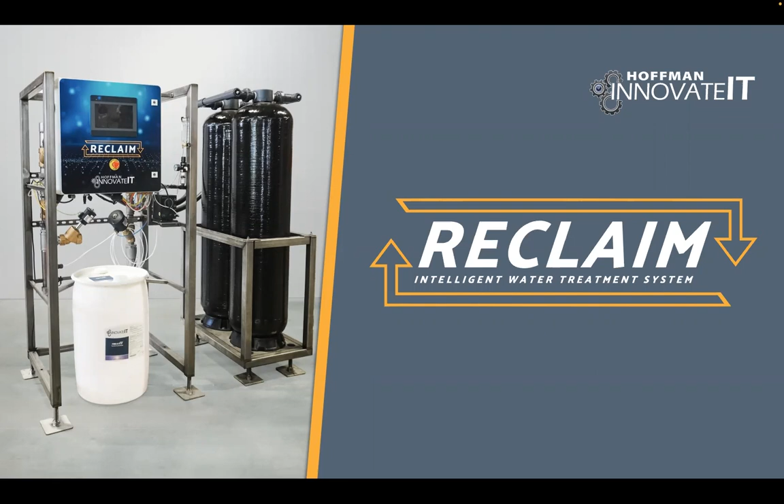Hello, everyone. Thanks again for taking the time to join us today for the webinar on our reclaimed water treatment system. This is one of the two products that we launched towards the end of 2022, something we're very excited about. I know some of you may have had the chance to see it at the Northeast Regional Car Wash Convention last September or at the SCWA Expo just a couple weeks ago in Texas.

This webinar really was going to serve as an overview of the system and some of the thinking behind the development and the challenges that people have been experiencing with existing reclaim systems that we're really trying to address with this system.

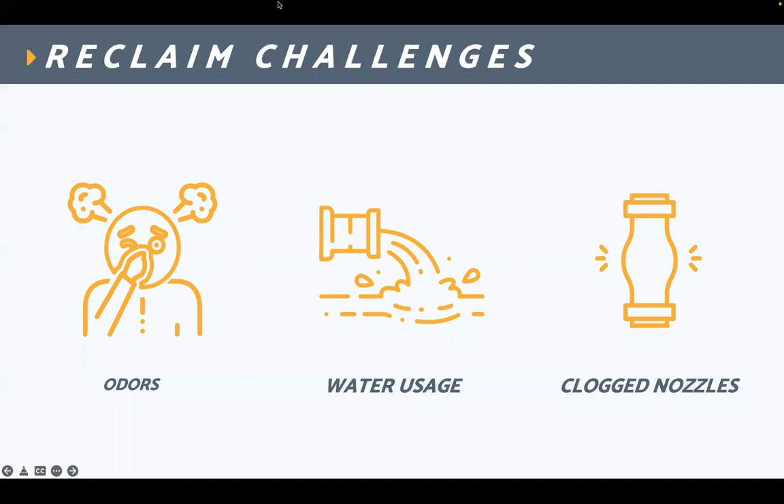The way we approached it, our solution to these odors, we decided to do chemical dosing of the system versus the commonly known ozone, which is somewhat dangerous and has a short shelf life, so to speak. So we worked with a local blender. We developed a non-hazardous chemical, which can be shipped via UPS if you happen to run out and needed a 5-gallon pail shipped right away. But it's user adjustable, which is really nice. So you can dial it in for your specific needs and cost per car.

Our system, which you're later going to see, could be considered a lower volume reclaim system. What we found is you really don't need a ton of water. You need a specific amount of water that you're going to use in your tunnel. Anything over and above that is great; you can use it to wash the conveyor pit or conveyor belt rinse system and all that. But we really wanted to get to a point where we treat the water you're going to use in the tunnel and stop at that point. That way you can reduce big storage tanks, holding tanks in the back room, which always cause odor. You got floats that overflow and you come in, the tanks overflow. And so we wanted to avoid all that.

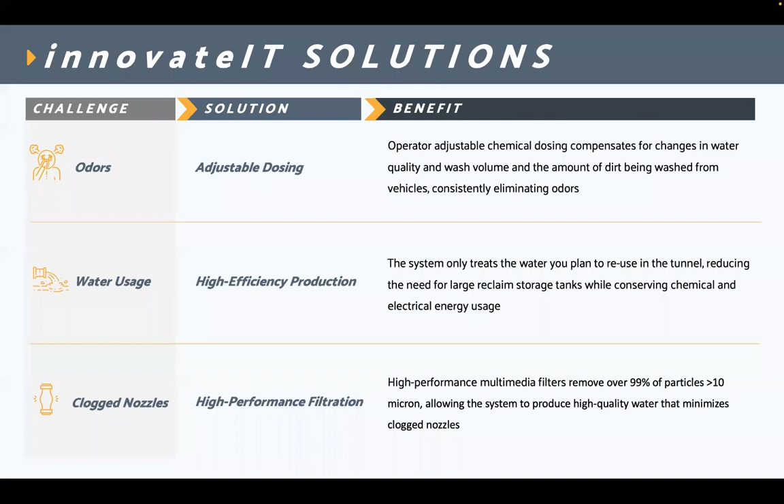Some of you may know, we like to install this equipment in our own washes and some select other beta washes. For our production run, we used a local wash right there in Colonie. Again, they were unclogging the nozzles every hour if they really could. We ran this unit for 81 days in that wash, and the manager did not clean the nozzles for 81 days. We pulled the beta unit out and proceeded to go into our main production design.

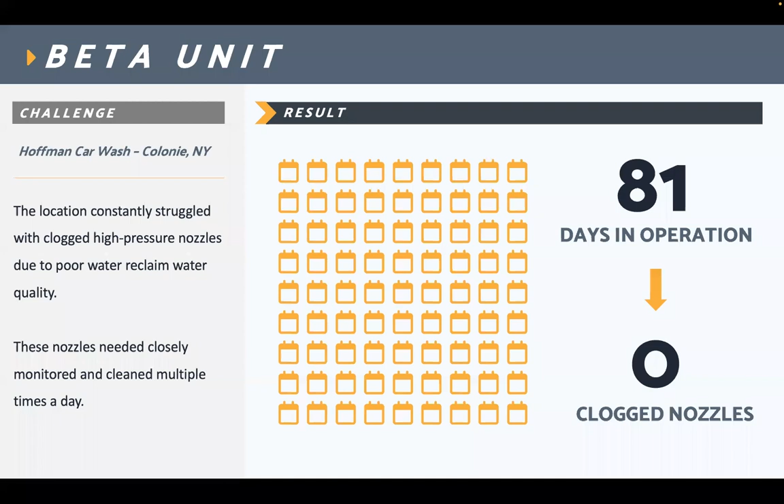So here's what the system looks like. We'll do a brief overview here. We've got a really good user interface, a touch screen on the front control panel where you can see everything the system's doing. Any messages or alerts that the system wants to notify you of will be on that screen. That's also the screen you would use to make site-specific adjustments.

We have high-performance multimedia filters on the right-hand side. Each one of those filter tanks will do 10 GPM. Currently we have a 2-filter system and a 4-filter system, and we're working on the 6. But our system, right now, has the standard flow of 20 gallons a minute, which is what's pictured here, and then up to our high flow, which is 40 gallons a minute.

Those numbers are quite a bit lower than what you typically hear about on trade show floors. Many people say, oh, our system can do 100, 150 gallons a minute of reclaimed water. We somewhat got trapped in that too, and bought several of those systems, and really realized that if you're doing 150 gallons a minute and washing 3 cars every minute, we weren't using 50 gallons of reclaim per car. We were using 10 to 15 gallons of high pressure reclaim per car. So that's how the math works out.

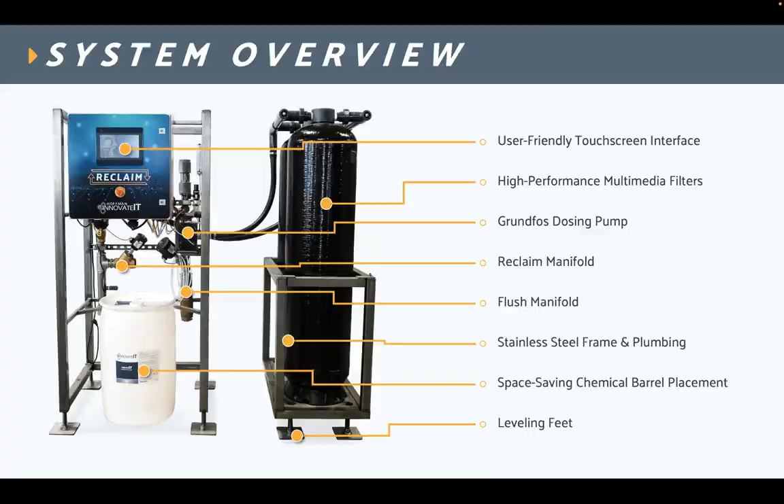Another integral part of this whole system is our micro bubbler stand that gets placed in tank 2. We're using compressed air for this instead of a separate 3 or 5 horsepower blower. We found through working on the beta units that you really don't need that big blower. You just need a small amount of air bubbling in the tank to increase your dissolved oxygen. This one has a stainless steel frame, and the air comes out from under those pans, creating a really nice aeration in the tank. You can hang it by chains or stainless steel cable, whatever your preference is, so you can easily pull it up out of your access manhole. It's quite simple, nothing exotic about it, but no maintenance required.

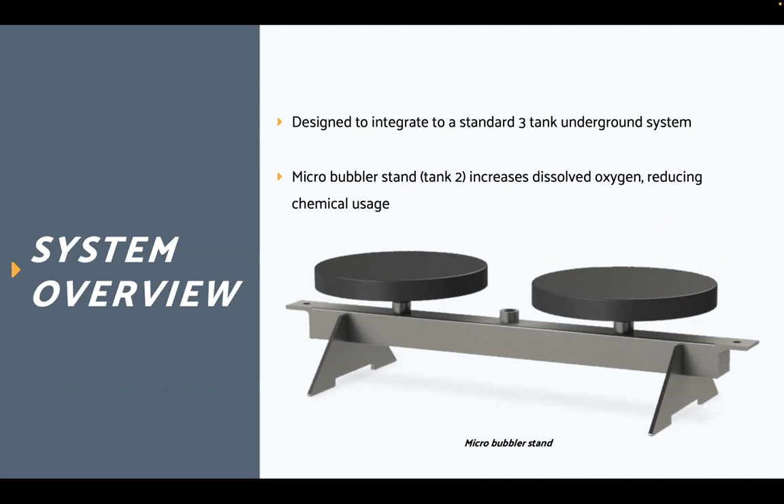The backbone of the system—every system has something that really separates it from other systems—and I would say in our system, it's this Grundfos grinder pump. Many of the systems out there, we all know, have a pump in the back room with a strainer basket. You have to prime it, and you have to clean the strainer basket constantly, and every time you clean it, you have to prime the pump again. Something funny that we run into a lot, even at our own locations, is we go to pump out the sediment tanks outside.

Truck comes, sucks it all out. Now the water level's below the inlet, and now you've got to wash a bunch of cars and wait to prime that pump inside again.

This pump and system we're utilizing here, this grinder pump from Grundfos, is outside in your third tank. It's a grinder pump, so any kind of trash in that pump, it'll literally grind it up. There's no need for a strainer basket, there's no check valves, it's self-priming because it's submersible. It's really just a rock solid setup.

If there's water in a tank, you turn it on, it's going to run, it's going to pump water. Roughly speaking, rough numbers, 60 gallons a minute, about 50 psi.

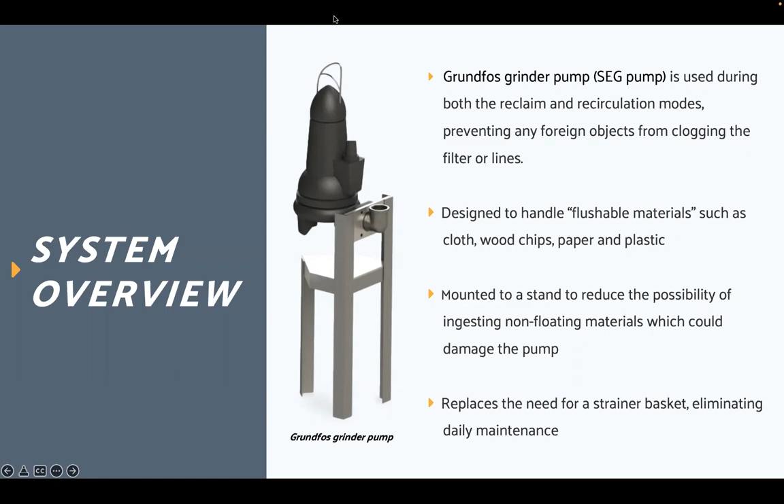Okay, now we'll get into some of the features. We're really looking at treating that water to make it as usable in your car wash as you can through the media filters. And just reiterating again, the grinder pump replaces that pump in your equipment room that has a strainer basket, along with the high efficiency multimedia filters.

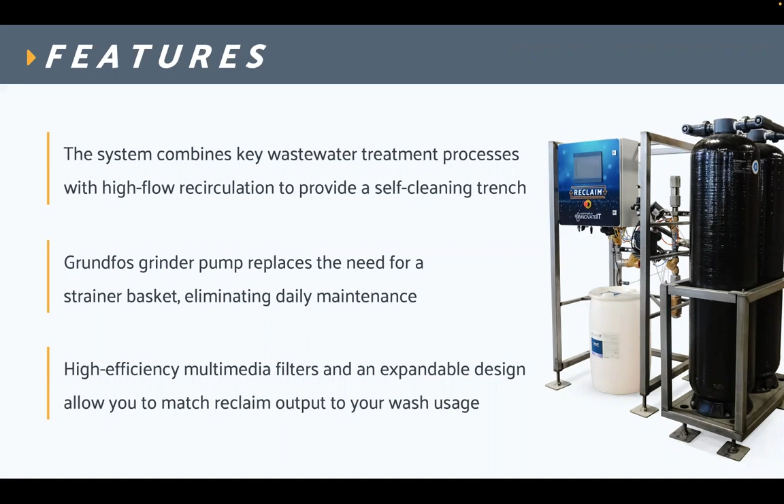The design of the whole system is you can expand on it, like the system pictured there with 2 tanks. If you decided to add another arch in your wash bay and needed more reclaim, you can just stack 2 more tanks on it with the interconnecting hoses, and you'd be up and running.

So here's a little bit of performance data for you. Our standard flow system, 2 tanks, roughly 20 gallons a minute, less than 10 microns, auto back flush. Same with the high flow - your output is going to double, going to 40 GPM, again less than 10 microns, with auto back flush features.

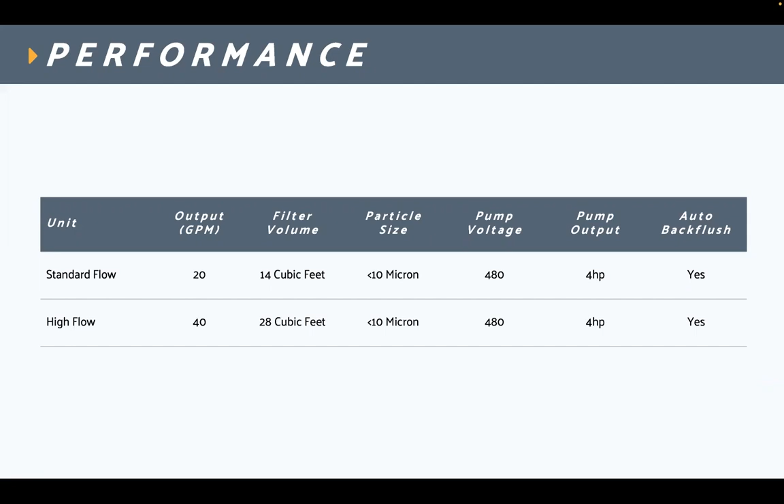Okay, so we'll get into how the system operates a little bit, and production type items for you guys. I don't have to read all that for you, I'll let you look at that real quick. We'll breeze through the next slide.

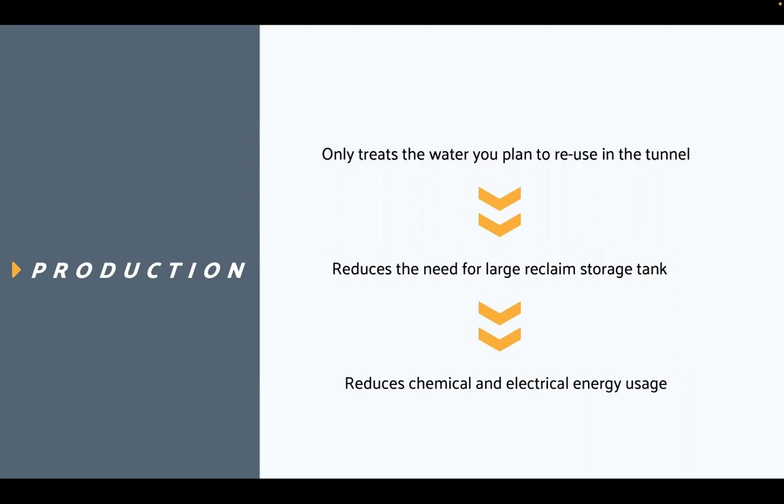Okay, the dosing - this is an integral part of this unit, and we'll talk about that a little bit. As this system is filtering water, as that water comes into our system, we're using a Grundfos dosing pump, injecting a little bit of that chemistry into that water flow. That water flow is going in through your media filters and out of the media filters into your wash system, so that oxygenating chemistry, which is preventing odor, is in the entire system from the time it enters your back room.

Because as soon as your piping or hosing coming from your sediment tanks enters that back room and connects to this manifold on our setup, that's where we're injecting this chemistry. So it's going through the multimedia filters.

If you use your reclaim in a tank on a high pressure pump stand, for example, in your back room, we all know from years past that water sits there overnight. It begins to grow bacteria, begins to smell. You come in the next morning and you're like, whoa, and you do your wet down. Maybe you run a couple cars, and then all that water that was in that high pressure holding tank has been used, and the smell subsides.

With this chemistry that we've been using and developing, it's got a shelf life of roughly 18 hours. So, for example, just say you close 7 or 8 o'clock at night and you open at 7 or 8 o'clock in the morning - that's 12 hours.

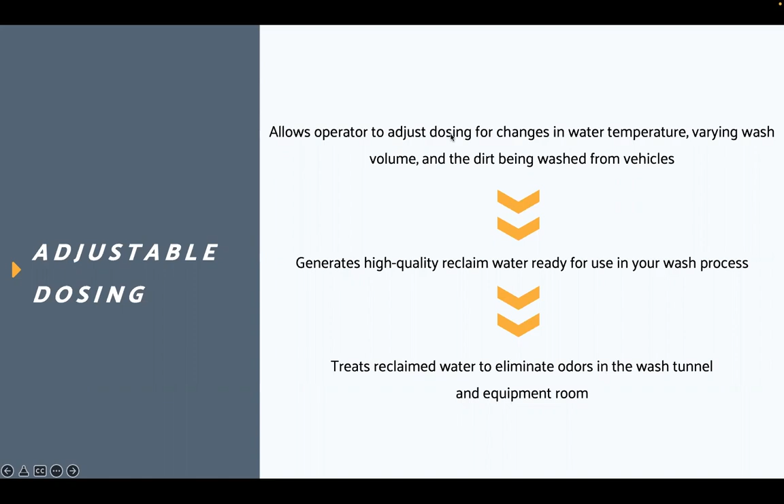Also, with this adjustable dosing, say it just flat out rains for 3-4 days and your car wash is closed. Obviously, you're past that 16, 18-hour window of shelf life of the chemistry. You have the ability to come in the morning, hit a button on your user screen that says odor eliminator. It'll start the whole process and do a little extra dosing to help you out, so when your customers come in, you don't have that odor.

Here's a little illustration of our multimedia filters, how they operate, some of the specs there - particles larger than 10 microns, and 60% of particles larger than 3 microns.

A lot of times, some of you operators might notice with your current reclaim systems, there are certain particles you're not getting out. When you spin the water in a hydrocyclone, you get the really heavy particles, like gravel or sediment that's in that water. It'll fly to the outside of the hydrocyclone and go back down your reject pipe. But there's a lot of buoyant particles that just don't come out - a lot of organic stuff that's lighter than water.

That's where the multimedia filters come in, because it filters anything and everything - the sediment, and in the fall time when you have leaves and grass on the road that often ends up clogging your nozzles, it's going through this multimedia filter and getting filtered out.

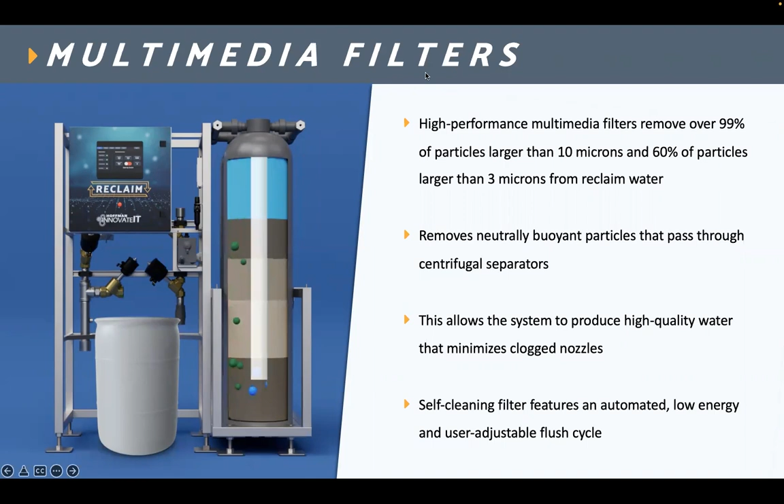The multimedia filters work on a pressure differential - that's one of the options, where you can set the system up to back flush these filters based on the differential between the inlet pressure and outlet pressure. You can also back flush it based on if you want it to hold off to the end of the day, which is nice. And that's all user adjustable.

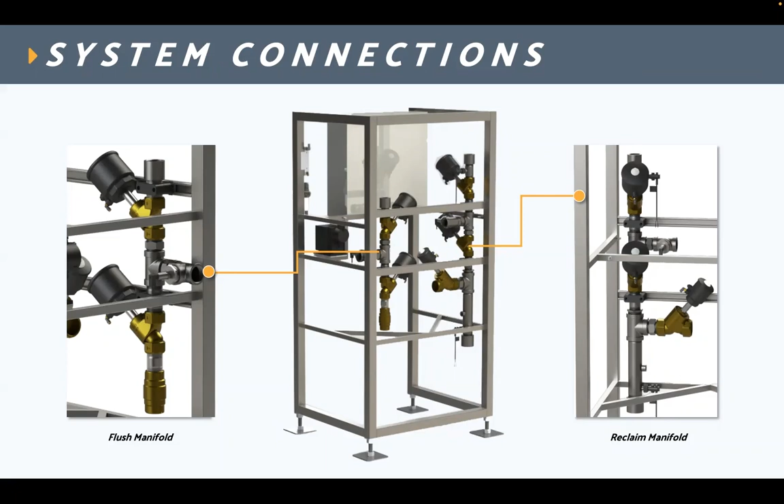So that covers the basic part of how our reclaim system works - some general specs on it and all that.

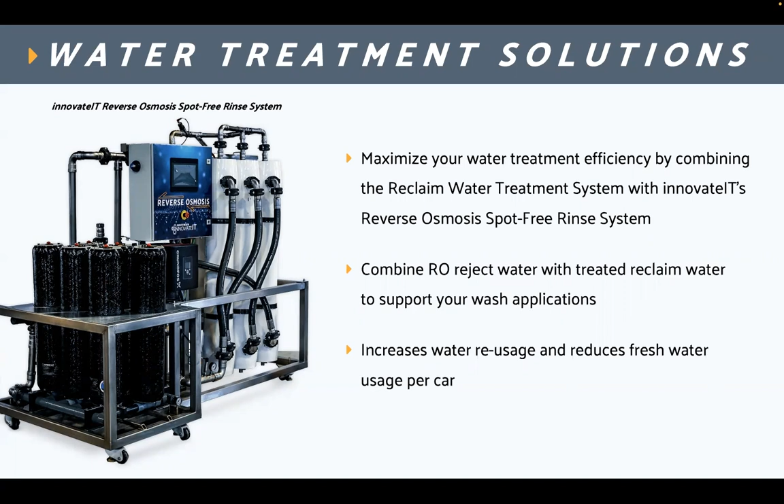We're looking at complete solutions, so I'd be remiss not to mention maximizing the efficiency of your car wash water usage. When you combine our new on-demand RO system along with the reclaim system, you can really maximize that efficiency - only treating and making the water that you're using, less storage tanks, smaller back rooms, and ultimately in the end, reducing your cost per car, as you can see on this slide.

You know, as you guys are typing, I can tell you a little bit about some of our testing.

The other day I did a tour and somebody asked about the maintenance on those black filters. Do you have to dump them out? What happens if they get plugged up? In one of our beta tests at one of our own washes, we literally plugged them solid. There was hardly any water coming through them at all. We just went to the touch screen and back flushed them a couple times, and we were back at 100%.

We've really strived to abuse this system in the tests to predict what may happen and what it would take preventatively, or for lack of better terms, maintenance wise, to put the system back at 100%. Again, with all our equipment we're striving for robust equipment that does not require a lot of maintenance, because with memberships we're washing a lot more cars and we can't be in the back room fixing this stuff every day. So I just thought I'd throw that out there for you.

So where does the backwash get dumped? The backwash, that would be your nastiest of all substances. The best practice would be to dump it after your sediment tanks, before your oil water separator, going to your sanitary system. Because if you reintroduce it back into your sediment tanks, you're just going to have to filter it again. So you really want to connect it into your sanitary system after your sediment tanks, since it's the nastiest of all substances.